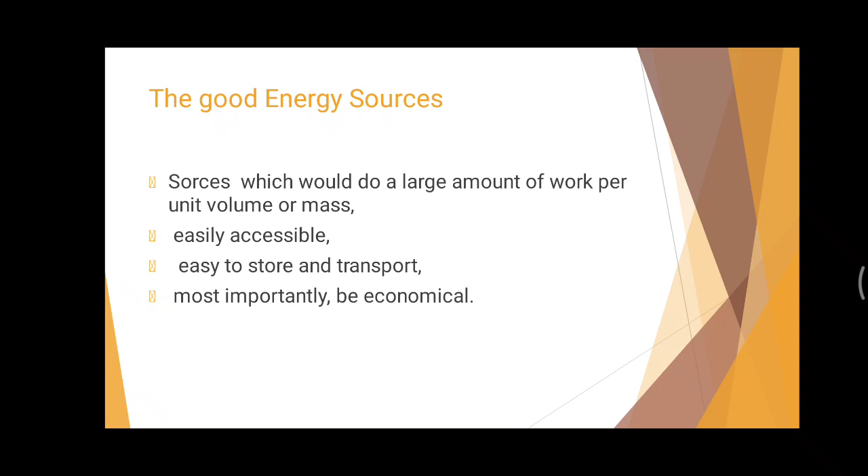The non-renewable energy sources, day by day their availability is getting reduced. As we are consuming, the amount of the source is getting reduced, and the new one is not getting formed along with our consumption. Such energy sources are known as the non-renewable energy sources. It is also known as conventional sources of energy. Petroleum, coal, all such sources are under the category of conventional sources of energy or non-renewable sources of energy.

First of all, come to the fossil fuels. Fossil fuels are formed by the anaerobic decay of organic compounds, and it almost needs millions of years necessarily for the formation of fossil fuels. The petroleum products, the crude oil, and the coal, all these things are commonly known as fossil fuels, and they are under the non-renewable energy sources or conventional sources of energy.

The coal and petroleum products are the major examples of fossil fuels. The petroleum products, including petrol, diesel, kerosene - all such things are under petroleum products. They are all formed or differentiated from the crude oil, as byproducts of crude oil.

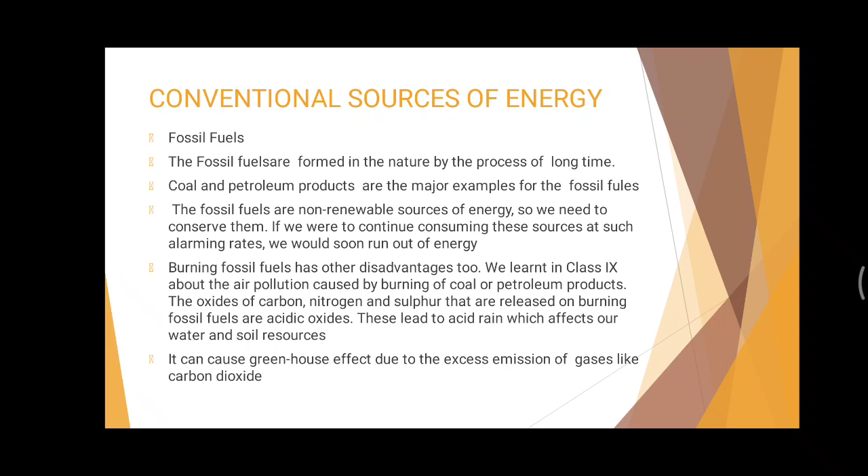Now, as we have discussed fossil fuels, the byproduct of the fossil fuel, we can say, is electricity in thermal plants. If you consider thermal plants, the electricity or energy is actually the byproduct of the fossil fuel, because as the fossil fuels heat up, heat energy will be produced. That heat energy will be converted into electrical energy with some machinery that we will discuss now.

So the fossil fuels are converted into electrical energy within the thermal power plants. Now one activity is given in your textbook.

One pressure cooker is there. We have to keep the cooker on the stove, pour some water inside it, and boil it with the seal closed. The knob over the seal should be connected to a steam pipe, and the steam pipe will carry the steam that is emitted from the pressure cooker.

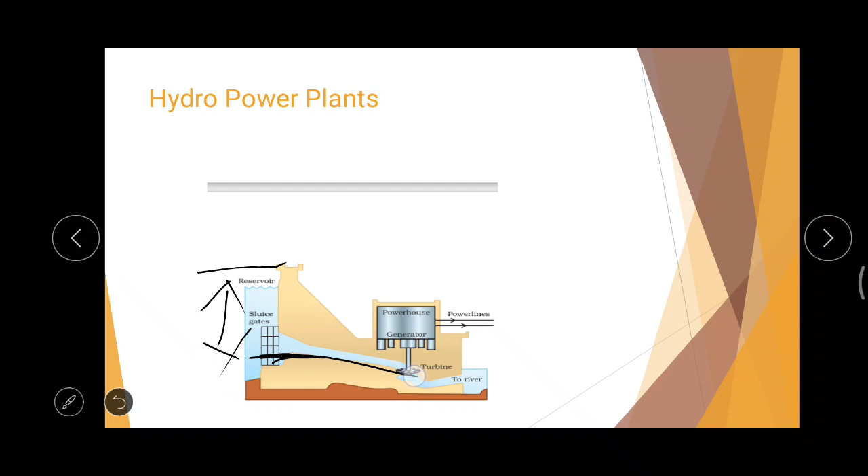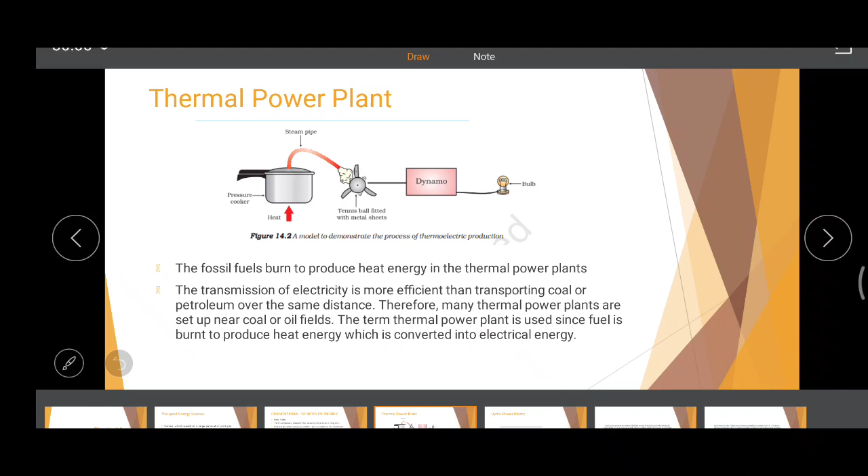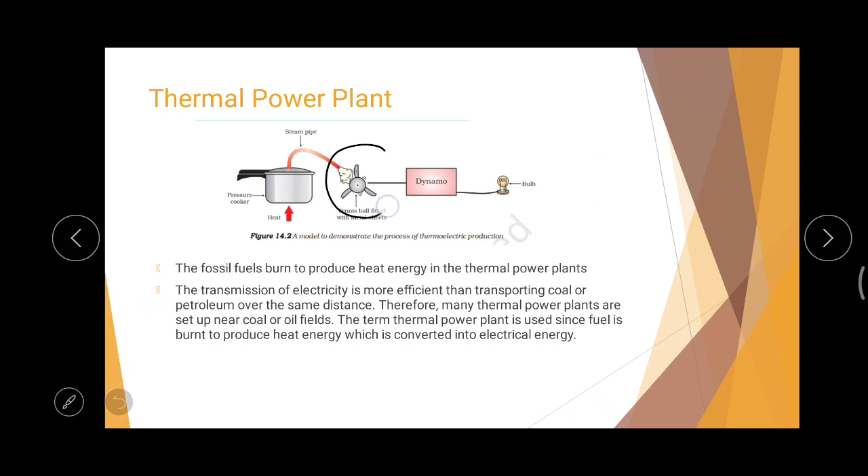So you allow the passage of water from the lower portion, and at one end there will be turbines. In the last case, the steam was allowed to fall on the turbines, but here the water itself, with high pressure, is allowed to fall on the turbine. Hence the turbine rotates, and since the turbine is connected with the generator or dynamo, the dynamo coils rotate and you can produce electricity from there.

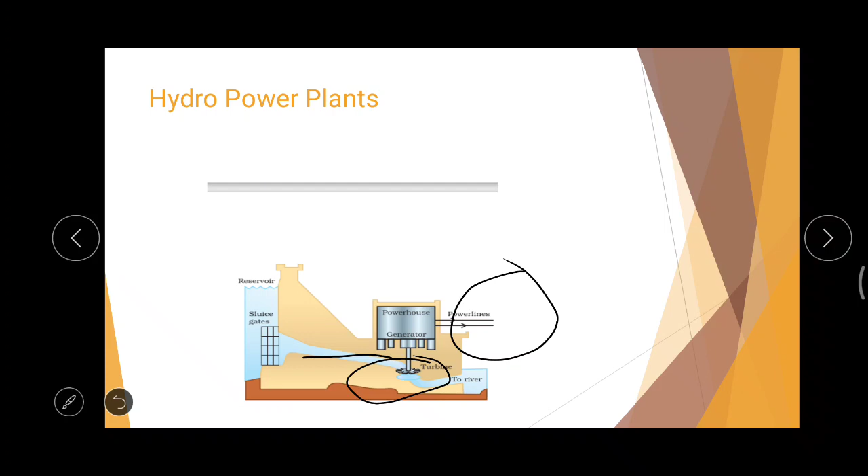So these are the hydro power plants. If we consider hydro power plants along with thermal power plants, or fossil fuels, the demerits are very less, or the pollution they cause is very less, but still there are some disadvantages. Comparatively, hydropower plants are a very good source of energy, but still there are some disadvantages that we will discuss.

Hydropower plants convert the potential energy of falling water into electricity. Since there are very few waterfalls which could be used as a source of potential energy, hydropower plants are associated with dams.

If a waterfall itself has enough potential energy to produce enough power, we can use the waterfall itself as a hydropower plant. But because of the deficiency of such waterfalls, we build dams and stop the flow of water, using up that potential energy of the water to produce electrical energy.

A quarter of our energy requirement in India is met by hydropower plants. Our terrain is mostly hilly, with many hilly terrains in our country, and the number of rivers is also more. So a quarter of the energy we consume is produced from hydropower plants.

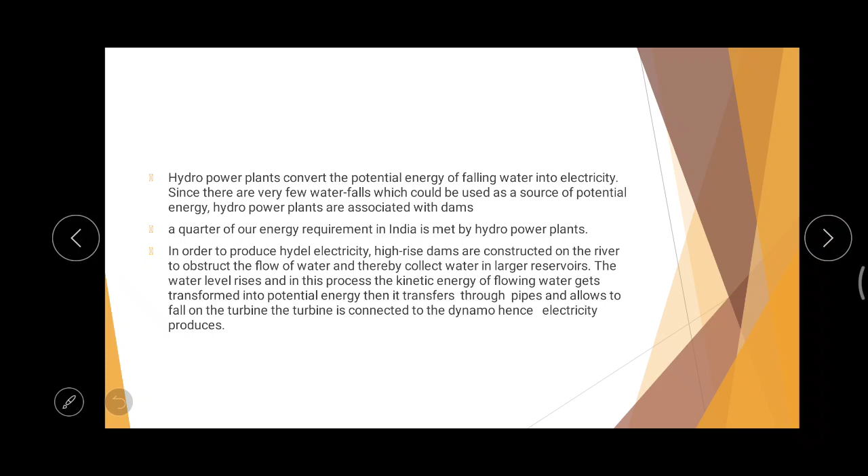In order to produce hydroelectricity, high-rise dams are constructed on rivers to obstruct or restrict the flow of water, collecting it in large reservoirs. Afterwards, it is passed through small pipes and allowed to fall on turbines, causing the turbines to rotate. When we allow the water to flow again, the stored potential energy is converted into kinetic energy, which helps the turbine rotate, and as a result we produce electricity.

Now we will discuss the major disadvantages of hydropower plants. The first is the construction of big dams. There are so many problems, as the reservoirs have to conserve thousands and thousands of liters of water. So when constructing the dam, we have to build it to store that much quantity or resist that much potential energy. That is a very costly and time-taking process.

We can construct these dams only in a limited number of places, preferably hilly terrains. Also, when constructing dams, large areas of agricultural land and human habitation get affected. When the dam is constructed and filled with water, a wide area around the dam gets submerged. That is the major reason it affects and destroys the ecosystem of that particular area.